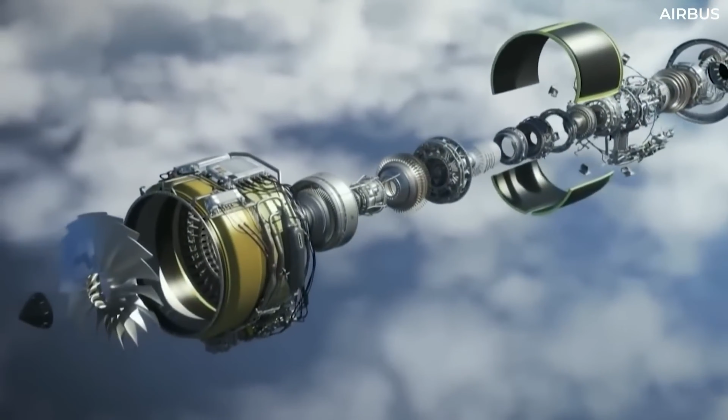What you see before you right now is the amazing future of the aviation industry. Try to picture it in your mind. You are walking toward your plane at the airport, but something is completely different. The familiar sound of jet engines has been replaced by an almost uncomfortable silence. The characteristic smell of jet fuel has completely disappeared. Instead, you are about to witness the greatest revolution in aviation technology since the dawn of the jet age.

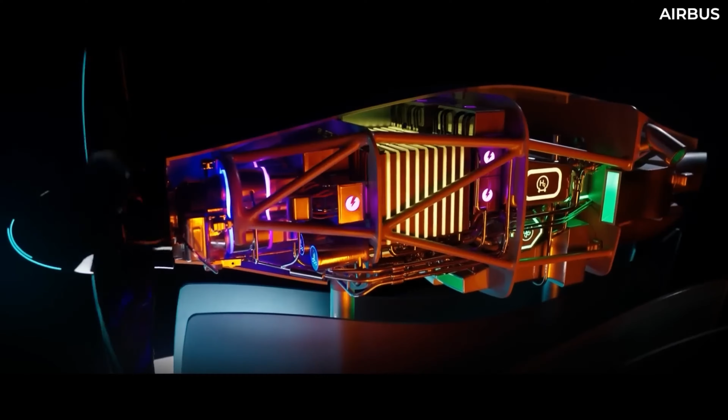Here it is, the Airbus ZeroE. This groundbreaking hydrogen-powered aircraft project has the potential to completely transform our perception of flight. But here's the real shocker. While other manufacturers are still chasing minor improvements to existing engines, Airbus has chosen a completely different path. They're not just building advanced aircraft, they're reimagining the very fundamentals of propulsion systems from the ground up.

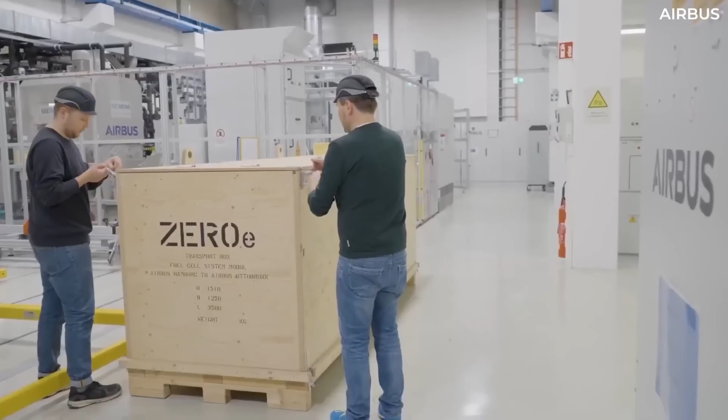And the timeline doesn't suggest these dreams are destined for the distant future. We are talking about aircraft that will enter service in the late 2030s or early 2040s. This will happen during the active working lives of pilots who are currently in training. Let's return to the starting point of this story with 3 revolutionary concepts from Airbus that challenge everything we know about aircraft engineering.

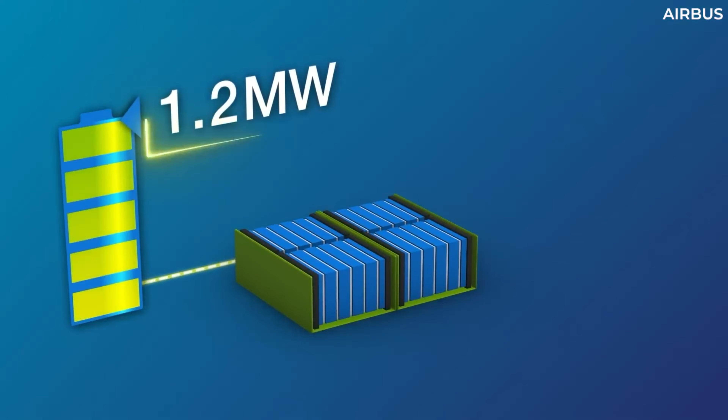The first design looked like the most classic design until it was examined in detail. This turboprop model had the capacity to carry 100 passengers over a distance of 1,000 nautical miles. But these were not standard turboprop engines. They were hydrogen-powered fuel cell technologies. Imagine the reliability of a turboprop combined with technology that emits zero carbon during flight. The only thing coming out of the exhaust is clean water vapor.

This model targeted regional routes like Amsterdam, London, and Boston, New York, routes where millions of passengers travel each year on old regional jets that consume excessive amounts of fuel. So why start with a turboprop? This is where strategic intelligence comes into play. Turboprops are naturally more economical at the altitudes and speeds at which these aircraft operate. Additionally, since they do not require the extreme heat levels of jet engines, integrating hydrogen fuel cell systems is much easier.

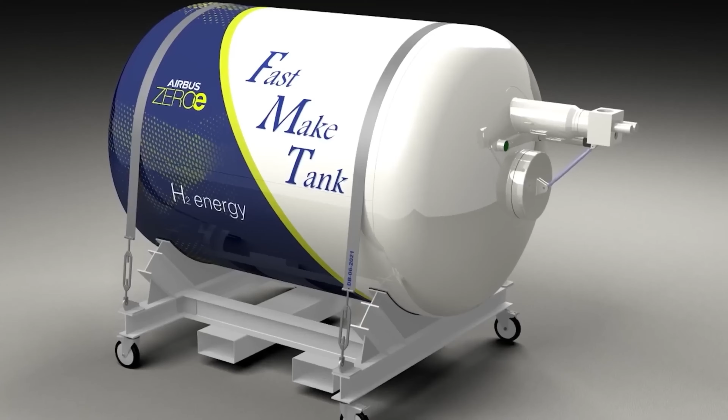The engineering approach is equally impressive in its simplicity. Fuel cells generate electrical energy. Electric motors power the propellers, and hydrogen stored at -253 degrees Celsius serves as the energy source. There is no combustion process, no emissions, just clean electrical power derived from the most abundant element in the universe.

The second concept was a turbofan model capable of carrying 120 to 200 passengers up to 2,000 nautical miles. This aircraft directly challenged the heart of commercial aviation. The narrow-body aircraft market was dominated by the A320 and Boeing 737. However, these engines bore no resemblance to any engines currently in service. Instead of kerosene, they were specifically developed to burn hydrogen directly. The combustion rate, materials, and all thermodynamic processes were designed from scratch.

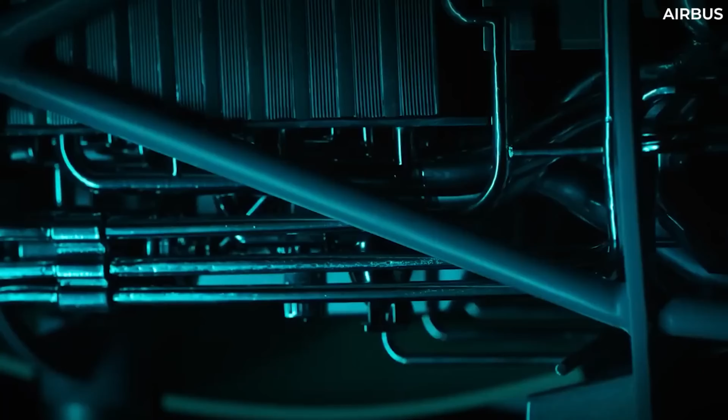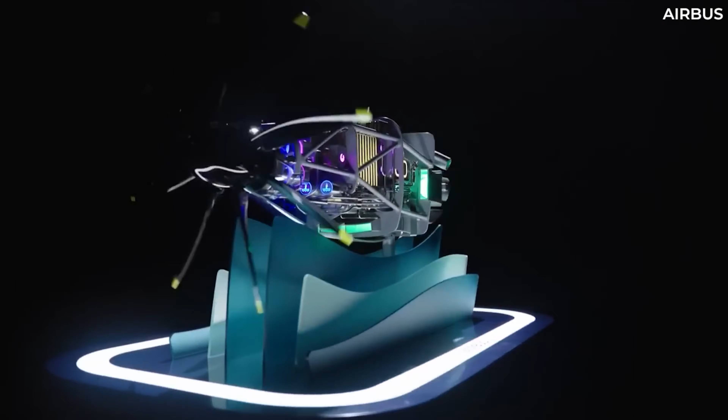There is a fact that many people are unaware of. Hydrogen burns at much higher temperatures than jet fuel. We are talking about flame temperatures exceeding 2,000 degrees Celsius. This required entirely new materials, revolutionary cooling mechanisms, and completely different engineering strategies. Unlike fuel cell designs, this turbofan concept would produce only minimal nitrogen oxide emissions during hydrogen combustion. While still far more environmentally friendly than traditional aircraft, this was a phased approach, not revolutionary, but evolutionary.

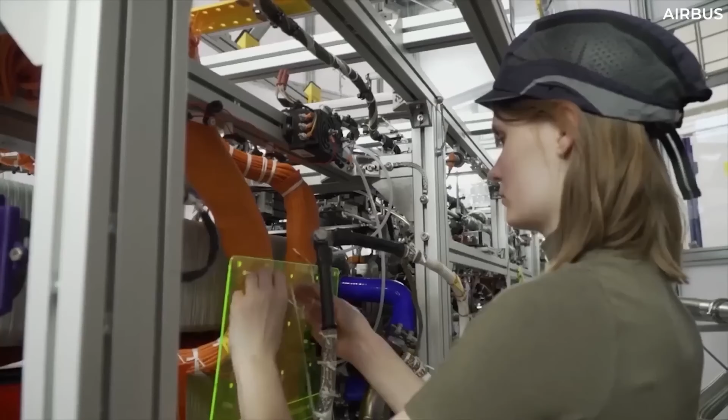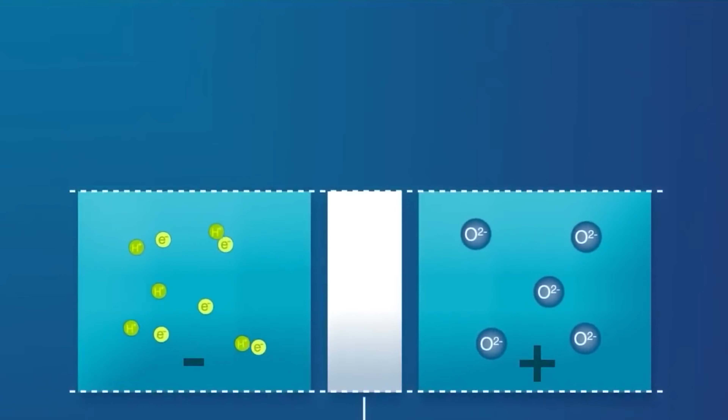And then the most radical concept emerged: the hybrid wing body, 200 passengers and a range of 2,000 nautical miles. But to call it revolutionary does not fully reflect its significance. This design challenged the aircraft design approach that had been valid for over a century. There is no longer a cylinder with wings attached to the sides. Instead, the wings and fuselage merge seamlessly to form a flying wing that carries passengers. Why such a radical change? Aerodynamic efficiency. The hybrid wing body could achieve up to a 20% increase in efficiency compared to traditional designs.

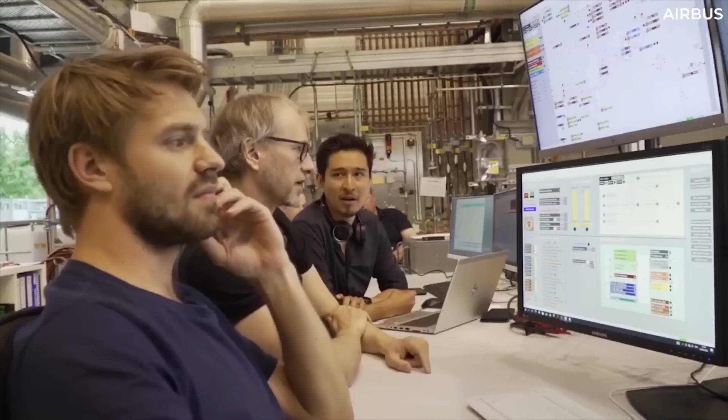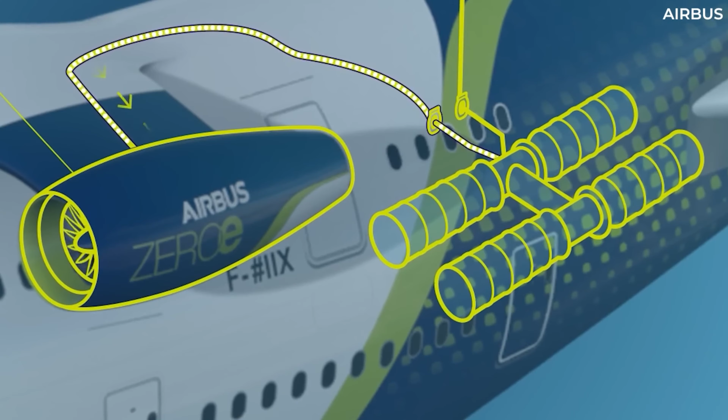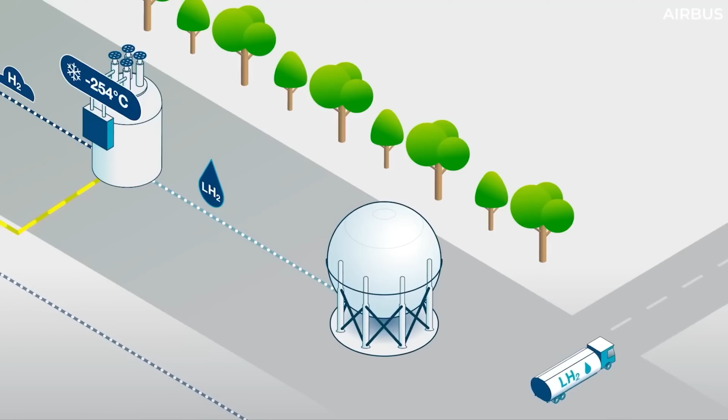However, there is another critical issue: hydrogen storage space. Liquid hydrogen requires enormous tanks with exceptional insulation. In a traditional aircraft, finding space for these tanks while maintaining balance and safety is nearly impossible. But with the winged fuselage, there is an immense internal volume to work with. The passenger experience would be at a level never before seen in commercial aviation. Spacious cabins, potentially multiple decks, and entirely new seating configurations. This wasn't just a new airplane, it was a new way to experience flight.

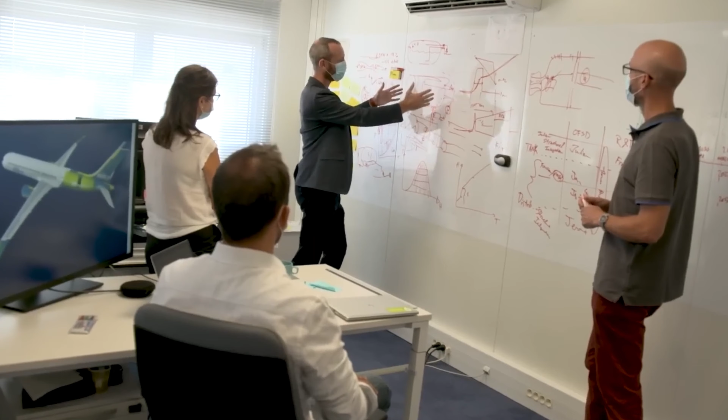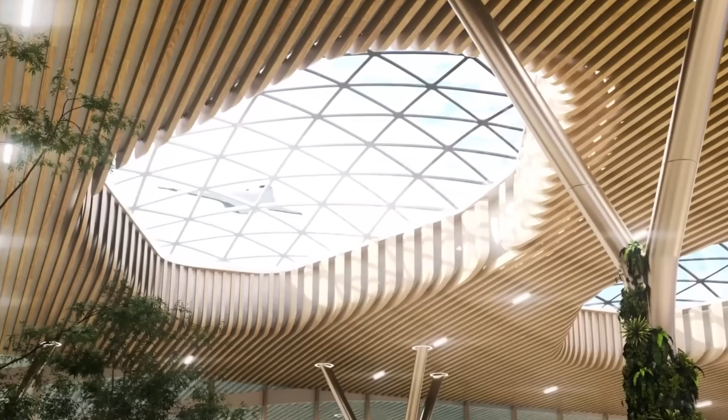Now, the story reaches a critical turning point. In early 2025, Airbus made a strategic decision that surprised many industry experts. Instead of pursuing three concepts simultaneously, they decided to focus on a single four-engine fuel cell-powered aircraft. This new design combines the strongest features of the three original concepts while also considering practical production and operational realities. Think of it as a synthesis of their research. It takes the fuel cell efficiency from the turboprop concept, the passenger capacity from the turbofan concept, and the innovative design philosophy from the hybrid wing body concept.

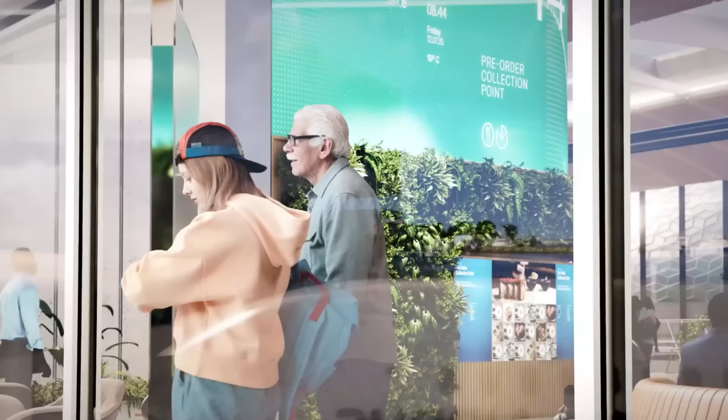So, what makes these aircraft so special? Let's take a closer look, because this technology is truly fascinating. At the heart of Airbus's new approach is fuel cell technology. However, we are not talking about fuel cells used in automotive applications. We are referring to systems designed to operate at 40,000 feet altitude and produce megawatts of power, meeting aviation standards. Here's how it works. Hydrogen from cryogenic storage tanks combines with oxygen from the atmosphere inside the fuel cells.

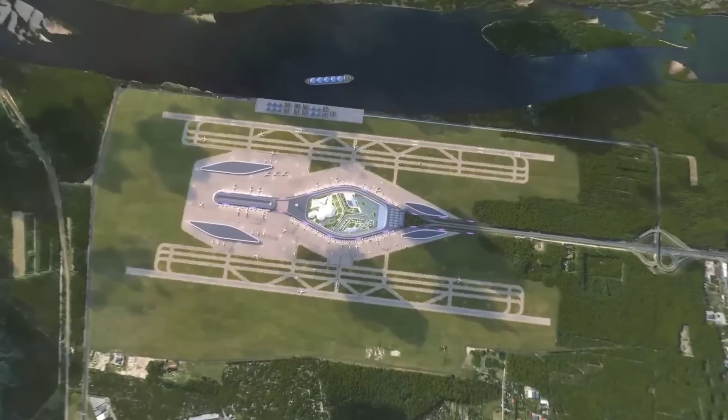This produces electricity that powers electric motors driving the propellers or fans. The only byproduct is clean water. In 2024, Airbus achieved a significant milestone with ElringKlinger by successfully testing an iron pod fuel cell system that generates 1.2 megawatts of power. That's enough electricity to power approximately 1,000 homes, an extraordinary achievement for aviation fuel cells.

Perhaps the greatest engineering challenge is storage. Liquid hydrogen must be stored at temperatures just 20 degrees above absolute zero, or negative 253 degrees Celsius, where molecular movement is nearly frozen. This extreme cold, close to the universe's deepest freezing temperature, requires incredibly sophisticated tanks to keep hydrogen in liquid form and ready for flight.

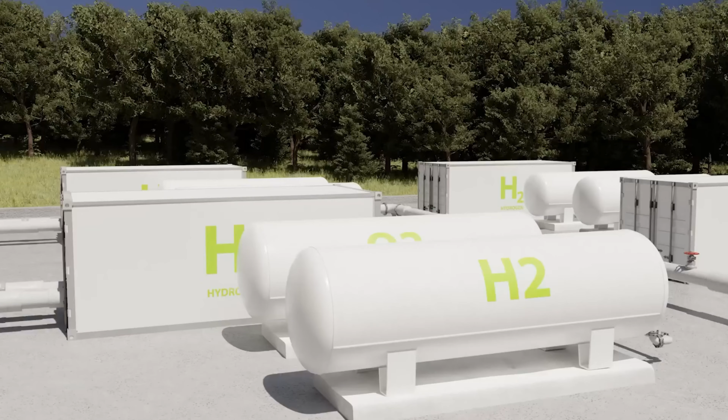To put this into perspective, it takes approximately 400 liters of liquid hydrogen to store the same amount of energy as 100 liters of jet fuel, and all of it must remain colder than anything currently used in commercial aviation.

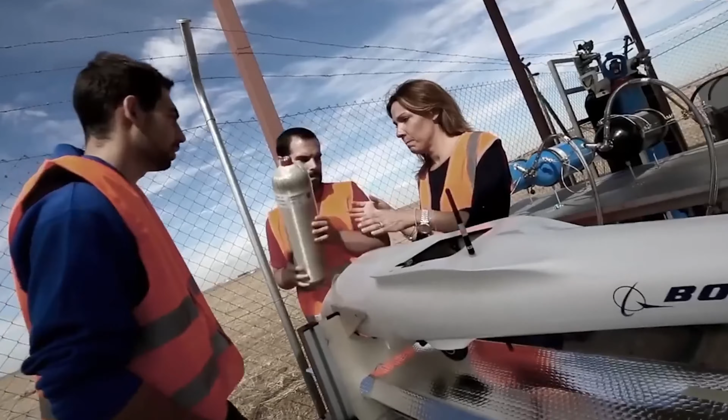Imagine boarding one of these aircraft. What would you notice? First, the absence of sound. Electric motors operate much more quietly. Airport operations would also change. You would no longer have to wait behind planes spewing exhaust fumes. The most significant change would be psychological. You would be traveling knowing that zero carbon emissions were produced during your flight. This would offer a completely new experience for environmentally conscious travelers.

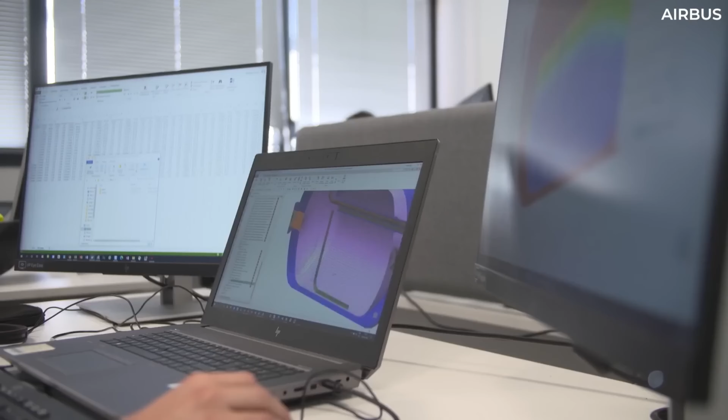Beyond the engineering challenges, infrastructure development is extremely expensive and complex. A major transformation of aviation's hydrogen infrastructure is needed. This is similar to the development of electric vehicle charging networks, but on a much larger and more complex scale. These aircraft are only as viable as the infrastructure that supports them.

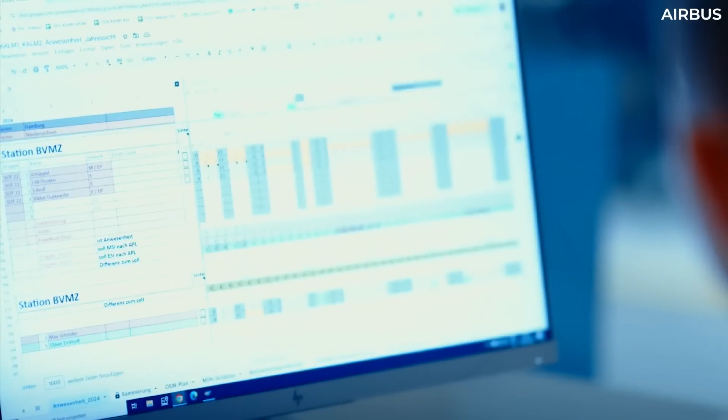Airbus has launched a program to develop hydrogen hubs in collaboration with major airports. We are talking about infrastructure that does not yet exist, such as hydrogen production facilities, cryogenic storage systems, and specialized fueling equipment. While Airbus is leading the way in hydrogen, it is not alone.

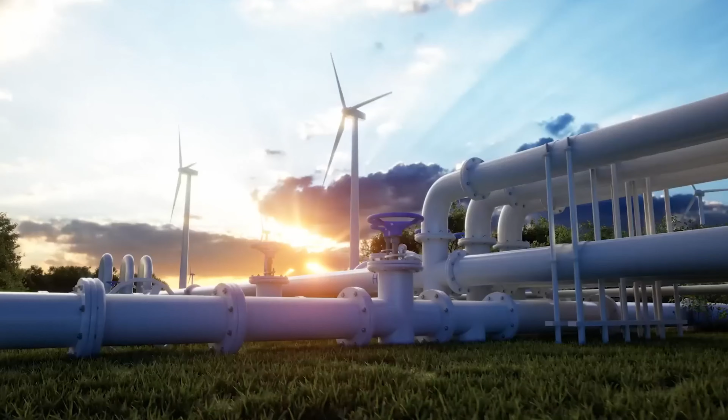Boeing is focusing on sustainable aviation fuels, while new companies are exploring battery electric solutions. This competition is accelerating innovation in aviation. Different approaches are complementary. Batteries for short routes, hydrogen for medium distances, and sustainable fuels for long distances.

Let's be honest about the timeline. In February 2025, Airbus acknowledged that bringing hydrogen-powered aircraft to market would be more challenging than originally anticipated. The original 2035 target has been pushed back to the late 2030s. This is the result of a responsible engineering approach.

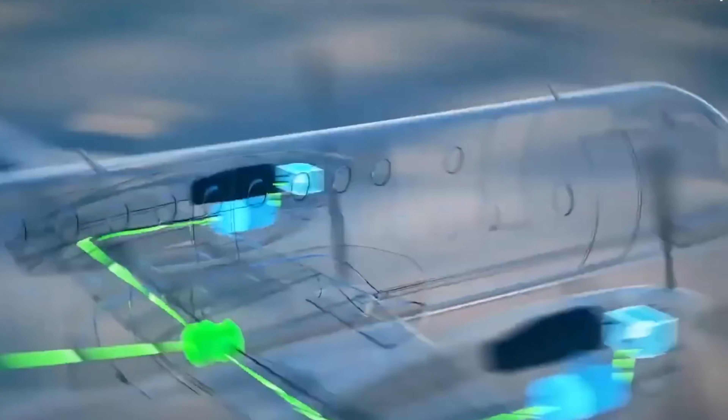Despite misleading reports claiming the cancellation of the ZeroE program, Airbus has confirmed that the program is continuing. Of course, this will happen with adjustments to the timeline and budgets. The physics and technology are working, as proven, but engineering integration and infrastructure development require more time.

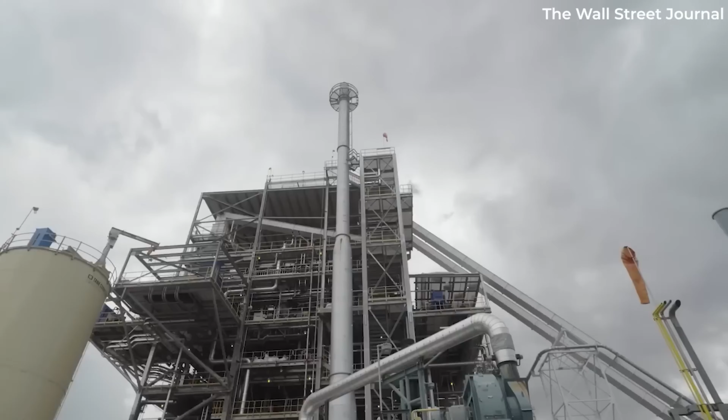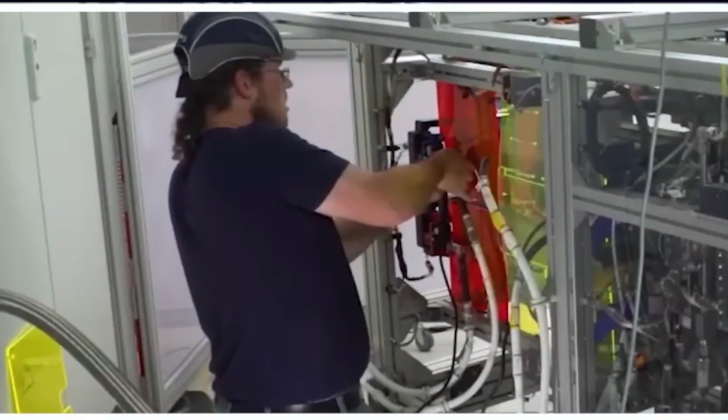From an environmental perspective, these fuel cell-powered aircraft produce zero carbon emissions during flight and emit only water vapor as a byproduct. When powered by green hydrogen produced from renewable energy, they can reduce aviation's carbon footprint by 50 to 80%. Hydrogen aircraft will be more expensive initially, but they could become economically attractive in the long term. Maintenance costs could be significantly reduced because electric motors have fewer moving parts. Increasing carbon taxes and scaling up hydrogen production will shift the cost balance.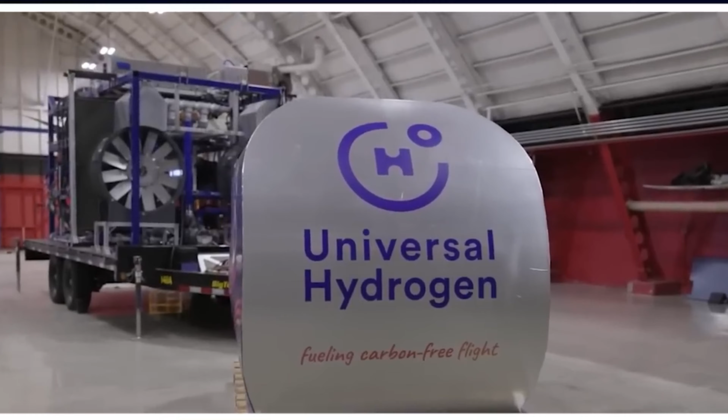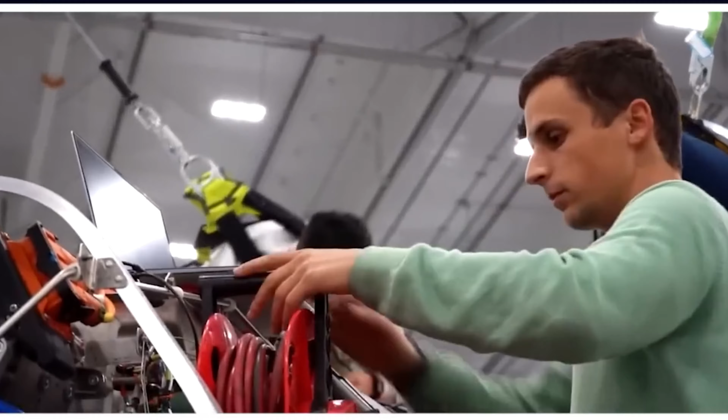Of course, there are challenges. Energy density remains a fundamental issue. Hydrogen requires about 4 times the volume of jet fuel for equivalent energy. Safety concerns and cost barriers also exist. However, these are not insurmountable.

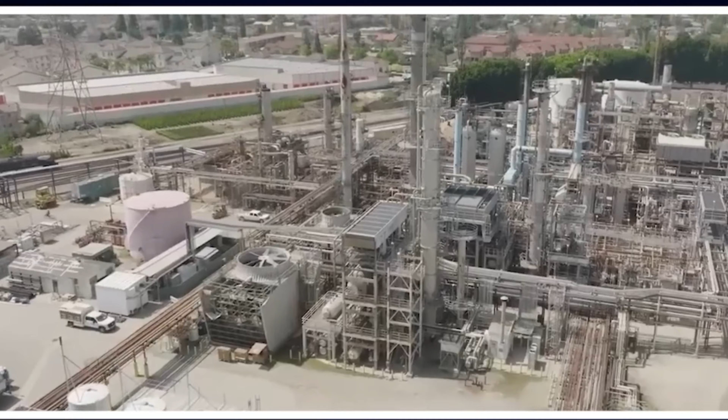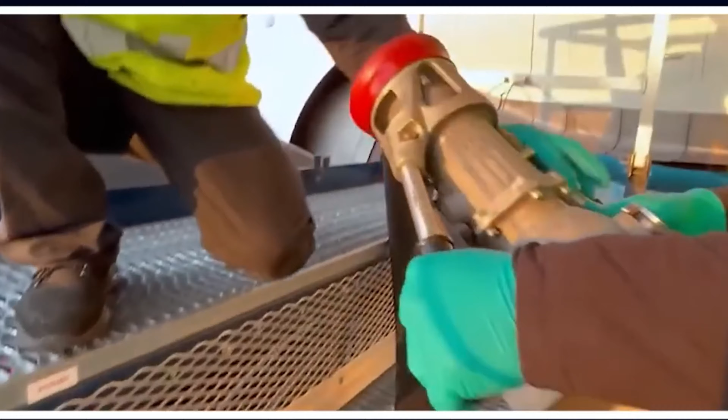In 20 years, the planes flying past you will be powered by the most abundant element in the universe and leave only water vapor in their wake. This future is no longer a question of if, but when and how. Companies like Airbus are working every day to make this happen as soon as possible.

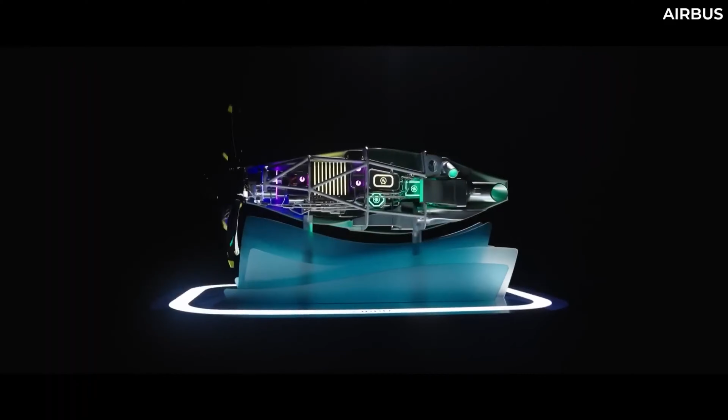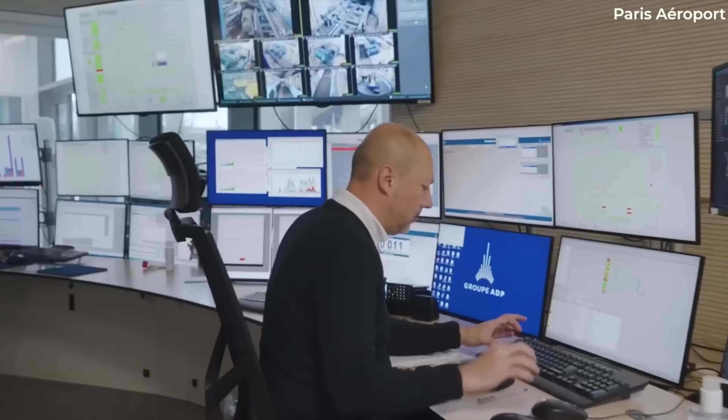If Airbus succeeds with ZeroE, the impact will extend across the entire aviation industry. Other manufacturers are accelerating their own hydrogen programs. Suppliers are investing in hydrogen-compatible components. The aviation supply chain is transforming. Working with cryogenic hydrogen and fuel cells requires new skills. Airbus is developing specialized curricula in partnership with universities around the world. This creates extraordinary opportunities for young engineers.

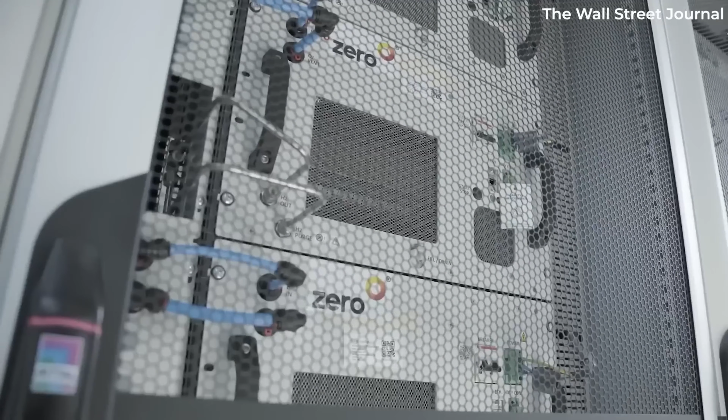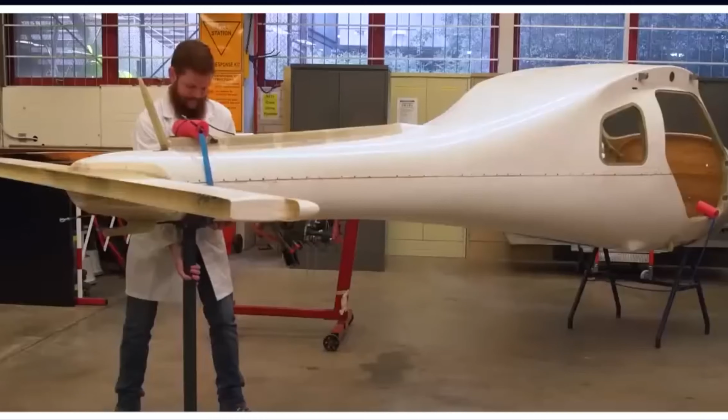Just as jets revolutionized air travel in the 1950s and 60s, hydrogen power could trigger equally profound changes. With reduced operating costs, new routes could become economically viable. Regional connections could improve significantly with quieter, cleaner aircraft subject to fewer environmental restrictions. The entire economy of air travel could change in ways we can't even imagine.

While previous aviation revolutions were driven by performance improvements, this revolution is driven by necessity. The need to meet the growing demand for air travel while making aviation sustainable for future generations. Today's traditional aircraft represent incredible achievements in engineering. Combined with sustainable aviation fuels, they will remain very important for decades to come. However, they may represent the past rather than the future of aviation.

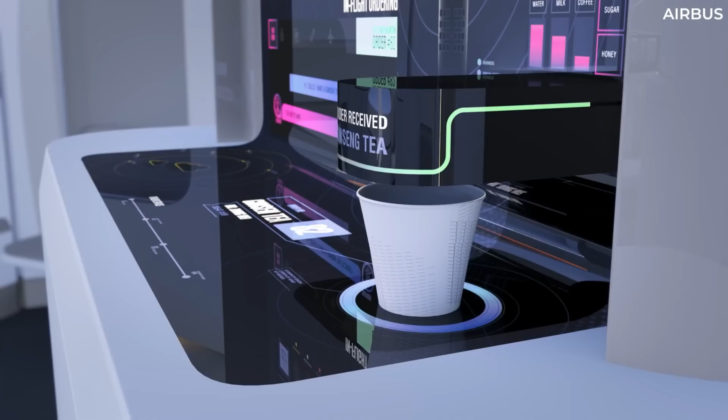The aviation revolution is coming. The physics works, the technology is available, the infrastructure is being built, and regulatory frameworks are being developed. It won't be easy, it won't be fast, and it won't be cheap, but it will happen.